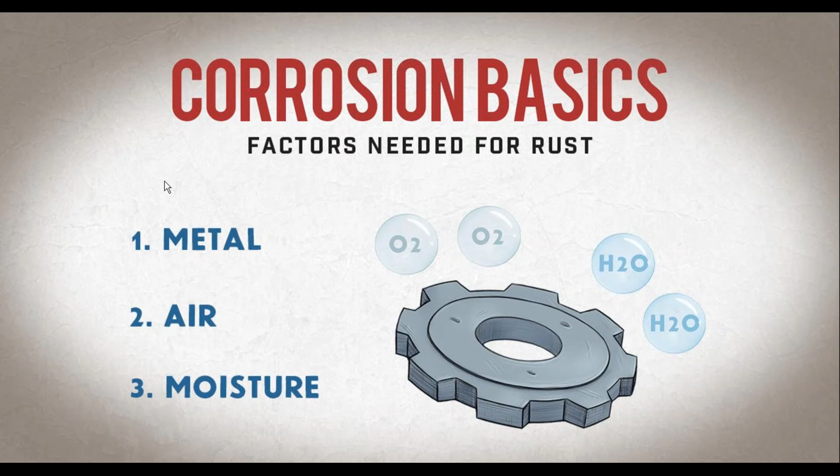So let's start with a little science. Take a moment and think about your customers, the customers whose brand you are protecting. Now, if you have ever sold any type of packaging to a customer that was packaging a metal part, go ahead and write yes in the comment section. We see lots of yeses. So if you're typing yes, your customer knows this slide you're looking at on your screen. That's because your customer knows all you need for corrosion, or for rust to happen, is that metal part they're shipping, air, and moisture.

I'm not a scientist, so I'm going to give you the project manager information on the multiple forms of rust. But if you want to go deeper, if you want to speak about a specific type of rust issue your customer is having, type that into Ryan right now. He's going to connect you with either the technical webinar you're looking for, or with the ARMOR sales rep who can help you. But right now, let's talk about just a few of the multiple forms of corrosion, so you can know this information when you're in front of your customer.

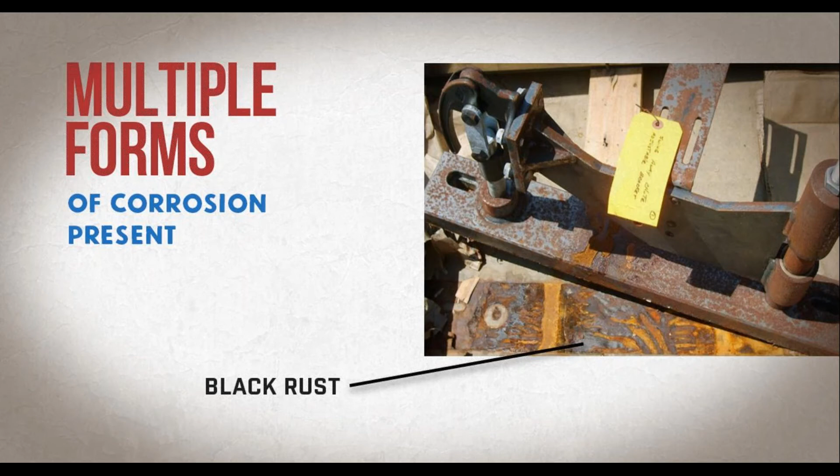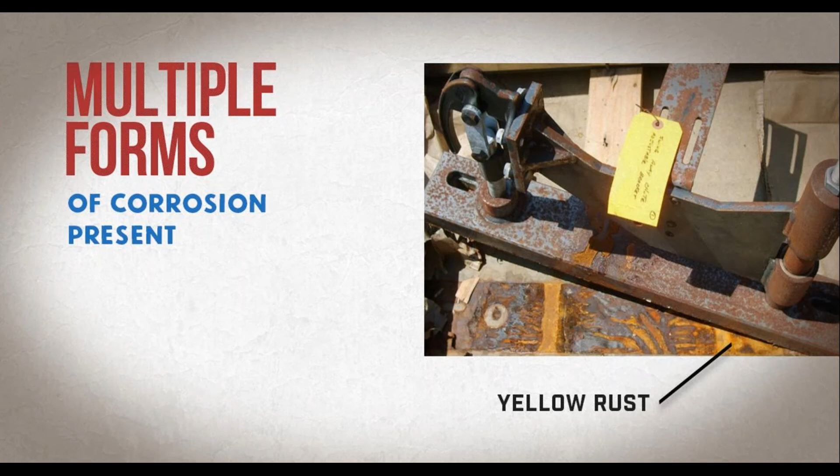Up first is brown rust, which we call atmospheric rust. For brown rust, the metal is exposed to high oxygen and low moisture. Next is black rust, which means the part was exposed to moisture, but low oxygen. So if your customer is seeing black rust, you can know that maybe there was a piece of film covering the part that did not have VCI in it. The last form of corrosion your customers could be seeing is yellow rust, which means there's an incredibly high amount of moisture on the part, usually standing water, or maybe the part was just not fully dried before it was packaged. And that's as deep as we're going to go today on the multiple forms of corrosion.

So now that you're a rust color expert, we need to know what are some of the reasons why our customers might see metal parts that are rusting during shipping and storage. So we have a top 5.

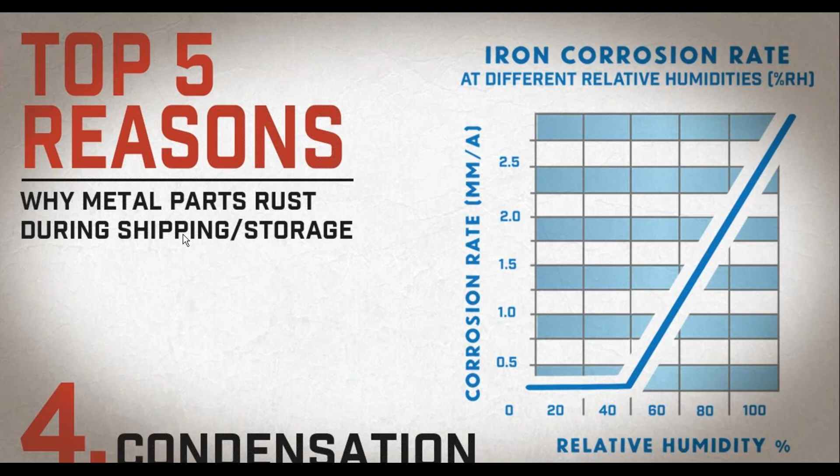As that airflow moves up and down inside the packaging and those temperatures shift, it can cause condensation. An easy solution people don't think about is stuffing some VCI package in those handholds, or maybe layering a piece of VCI between all the returnable trays. So when you think about condensation and humidity, don't just think about the environment outside the packaging, but also the environment inside it.

So you can remind your customers, especially if they say to you, we are seeing yellow rust, that they could either put metal parts in a wire basket and allow them to air dry, use forced air or heat, or if that's not possible in their process, maybe they need to include a form of desiccant inside their packaging, or an ARMOR VCI Smarty Pack, which is a combination of VCI and desiccant.

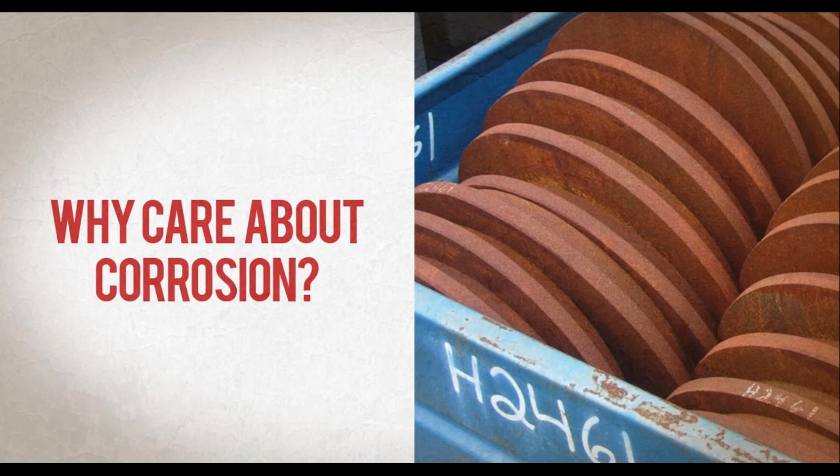And the best way to show you how rust is expensive is to show you what we call the rust iceberg. So just like the Titanic, it did not sink because of the iceberg that it saw sticking out of the water. It sank because of running into the iceberg that it didn't see underneath the water, or what we call, for a rust iceberg, hidden cost.

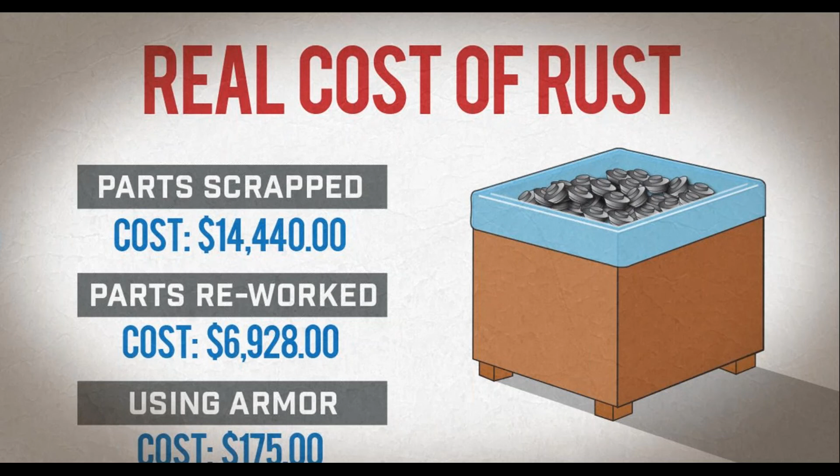So go ahead and type in the box. And don't worry, not everyone can see your answers. Have you ever sold VCI? If you have, just type yes. But if you haven't, then we're especially glad that you're here, but go ahead and type no. Great, we see lots of answers coming in.

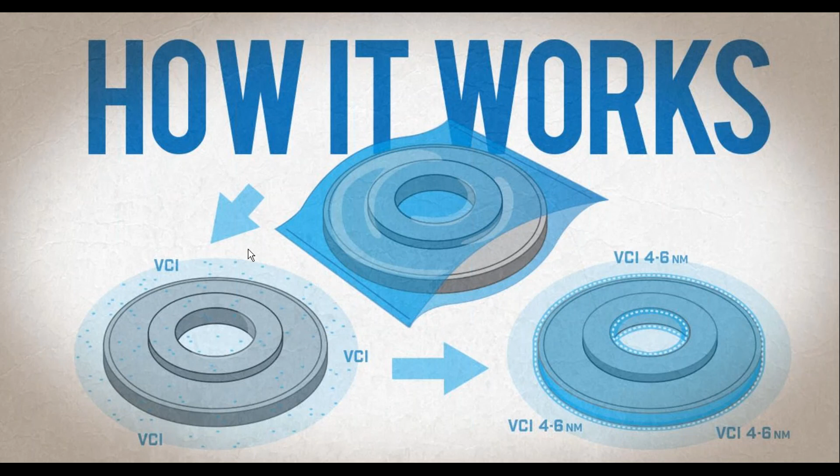This next picture, well, you can say, well, how does it do that? So when you take your metal part, whether you put that in your poly bag, whether you put that in paper, whether you put that in a closed space with a shield emitter, you have to imagine, and if you look at the picture of those white molecules, imagine the VCI leaving the carrier and being attracted to the metal part. Then the VCI puts a protective coating on the metal part.